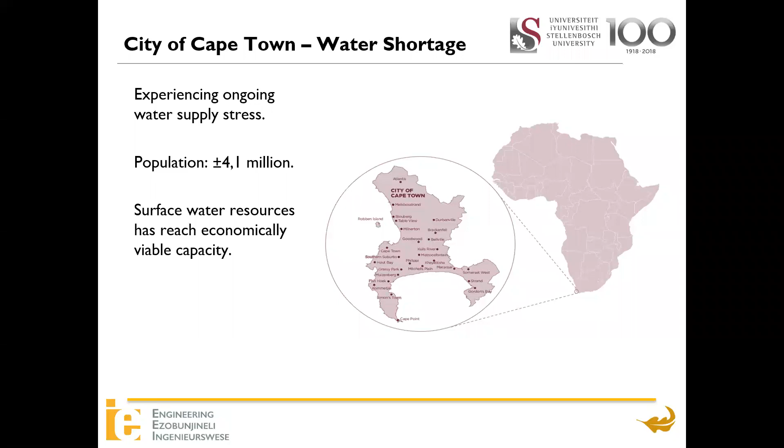So let's jump in. The city of Cape Town is an urban area with a population of over 4.1 million that is experiencing ongoing water stress driven by climate change with extended periods of drought, urbanization, pollution, and economic growth. The majority of the city's water demand is for potable water, which is sourced from surface water resources.

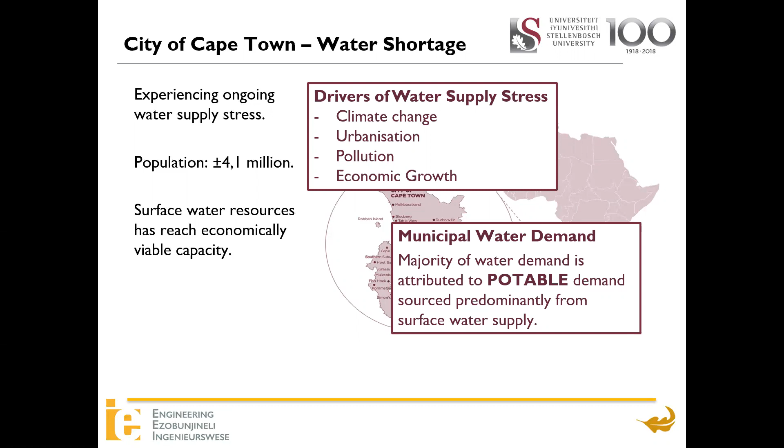Surface water resources in the Western Cape water supply system have already reached their economic viability, meaning it's not feasible to build more dams. The affordability and reliability of water resources impact the future and current investments of economic activities within the city. This highlights the economic importance of suitable and affordable water resources.

At present, approximately only 10% of water is treated for reuse in the city of Cape Town, with the reuse limited to non-potable application for industry or irrigation. Not only are the Sustainable Development Goals for 2030 encouraging the increase of treatment of wastewater, but within the reuse sphere, there lie several avenues of value generation. The value of reusing wastewater extends further than cost savings. It also reduces the demand for constrained resources.

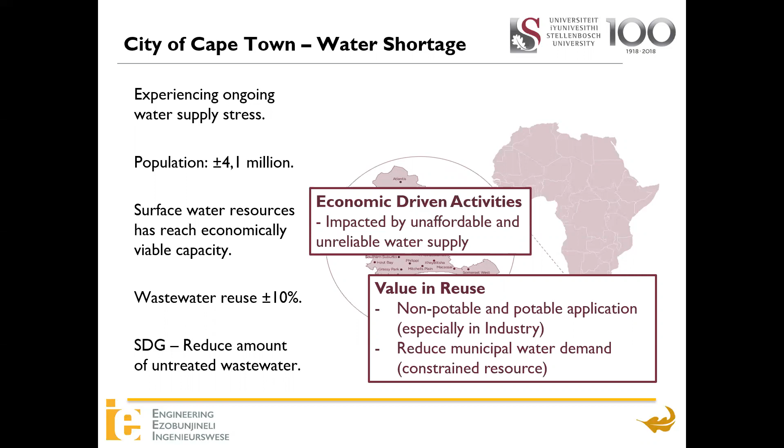In industry, the potential for effective reuse of wastewater can be derived from both centralized and decentralized sources. Centralized wastewater treatment plants offer non-potable water sources for several industry purposes, and decentralized wastewater treatment plants are implemented successfully in mines, using the treated water for a range of non-potable purposes on site. However, the majority of water requirements are attributed to potable water needs.

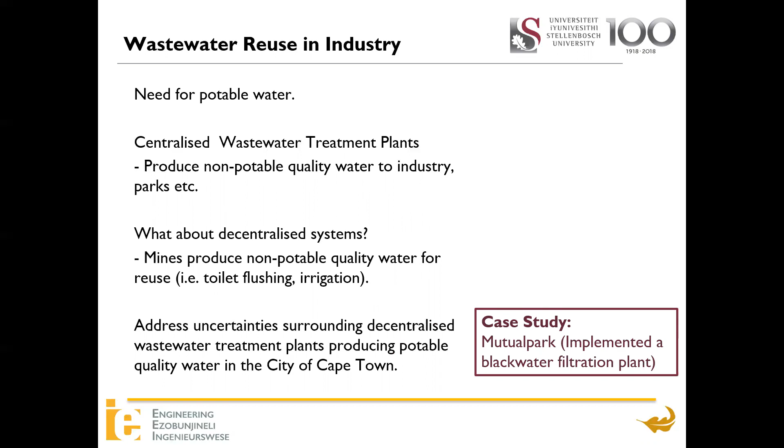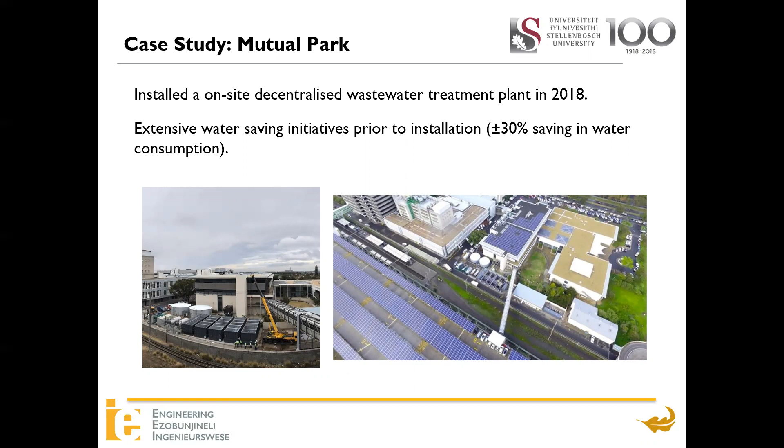To address the uncertainty surrounding the feasibility of utilizing decentralized potable water treatment plants in water-stressed areas, a case study was selected. Mutual Park in Pinelands, Cape Town, has implemented not only extensive water-saving devices and practices, it has also piloted a black water filtration plant, producing potable quality water for direct on-site consumption in 2018.

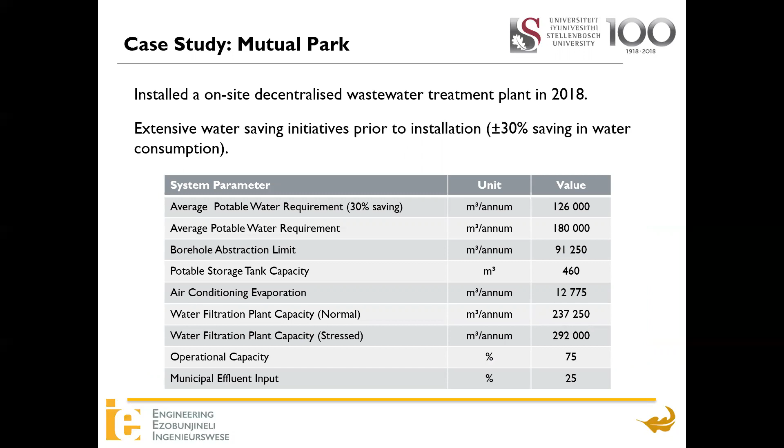The case study investigation brought to light several system parameters that were used to model the decentralized wastewater treatment system in Vensim. These parameters include the annual consumption, borehole abstraction limits, storage tank capacity, and the plant capacities of the system.

To visualize the flows of different quality water within the system, a conceptual model for the Mutual Park campus water system was constructed. The blue lines illustrate the flow of potable quality water, while the gray illustrates the treated effluent or grey water from the municipality. Yellow presents the on-site groundwater, and black, the wastewater or black water. The losses are also indicated with red.

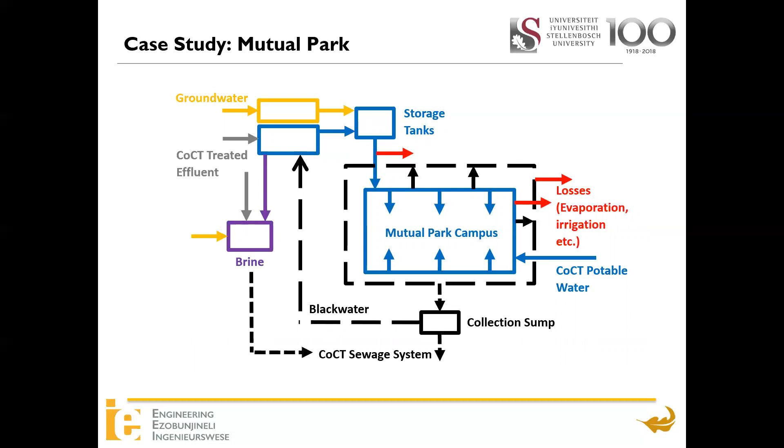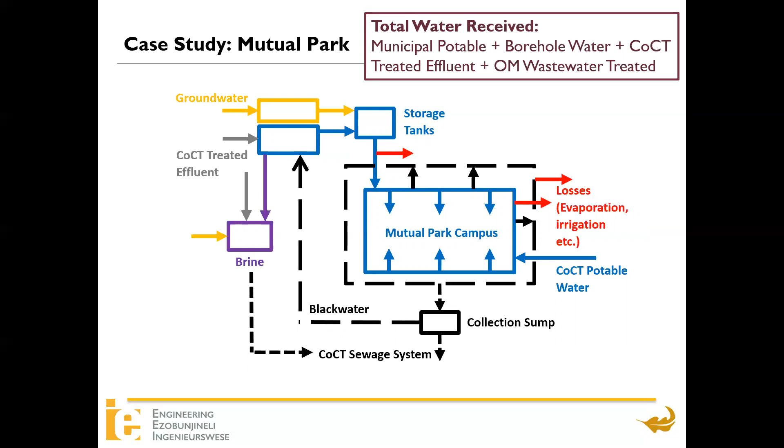Although wastewater can flow from the collection sump into the city's sewer system, wastewater cannot flow into the system from the city, even if the capacity for treatment allows for additional processing. The system receives water from the municipal sources, both potable and non-potable. Water also enters the water ring from 2 on-site boreholes and treated wastewater from the decentralized black water filtration plant.

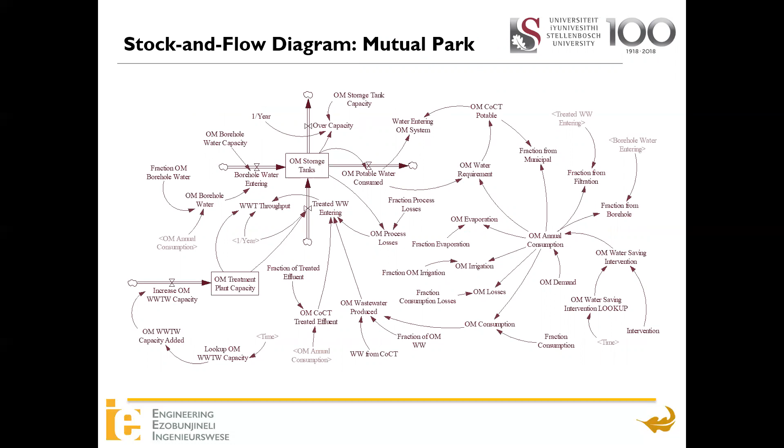From here, the detailed system dynamics model was constructed. 2 stocks are identified: the Old Mutual storage tank capacity and the Old Mutual treatment plant capacity. I'll highlight some key functions. The system throughput is calculated as the total treated wastewater entering the system divided by the Old Mutual treatment plant capacity.

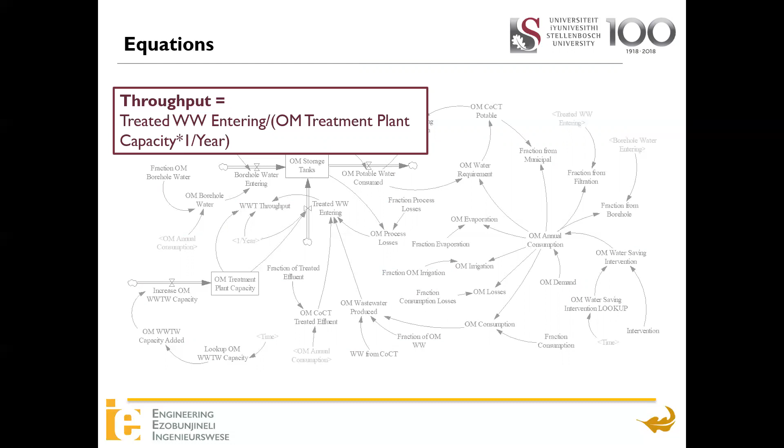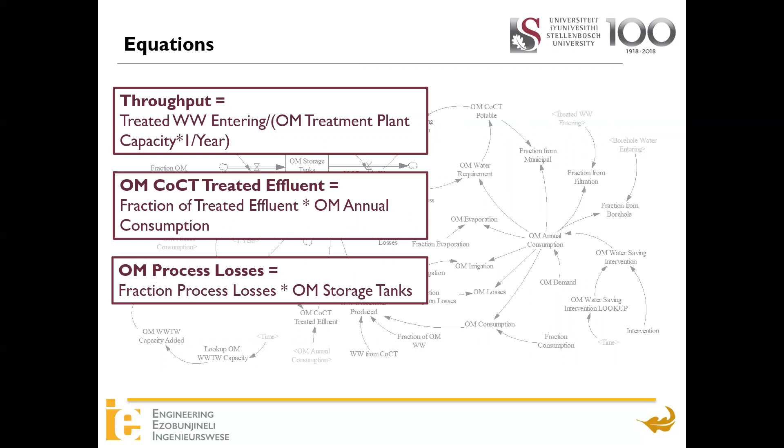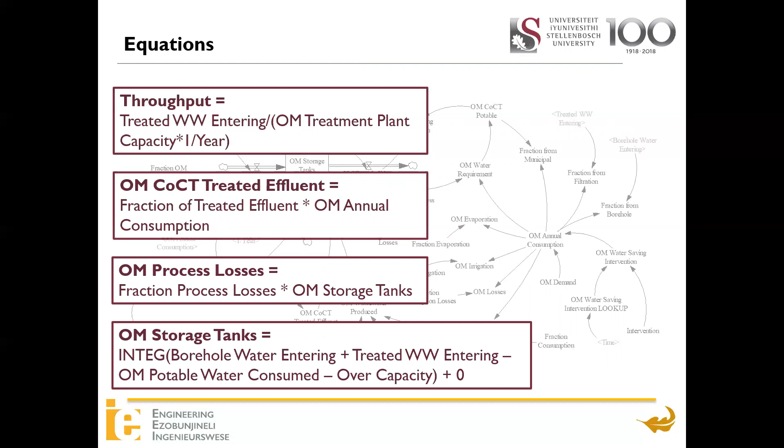The treated effluent from the centralized City of Cape Town system can be used to supplement wastewater entering the Old Mutual system. The system dynamics model also accounts for system losses, both the process and consumption losses. Storage tanks take in the water from the independent groundwater treatment system, which is treated to potable quality as well. It also takes potable quality water from the black water filtration plant. Water consumed is subtracted to reduce the amount of water stored within the tank.

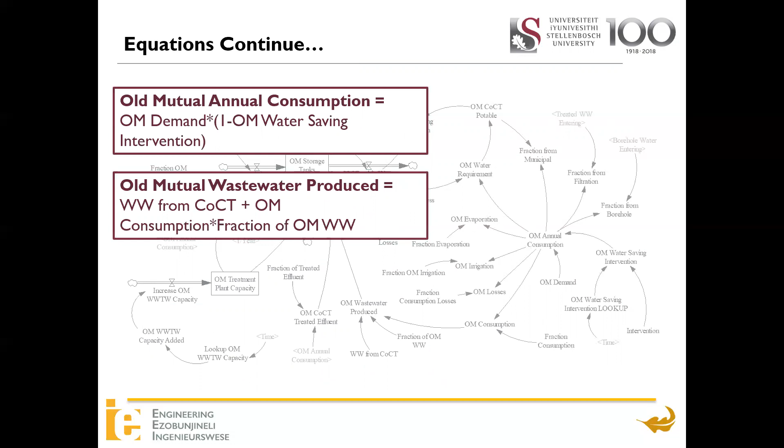Other functions include Old Mutual consumption, based on the percentage of water saving, and the amount of wastewater produced on-site. This function allows for future adjustment in the event that the City of Cape Town allows for wastewater from the centralized sewer system to flow into Old Mutual's wastewater system. This formula makes provision for the limit on treated wastewater entering the system based on the system's capacity. I've provided the calculations used in the model as additional information for those interested in further details.

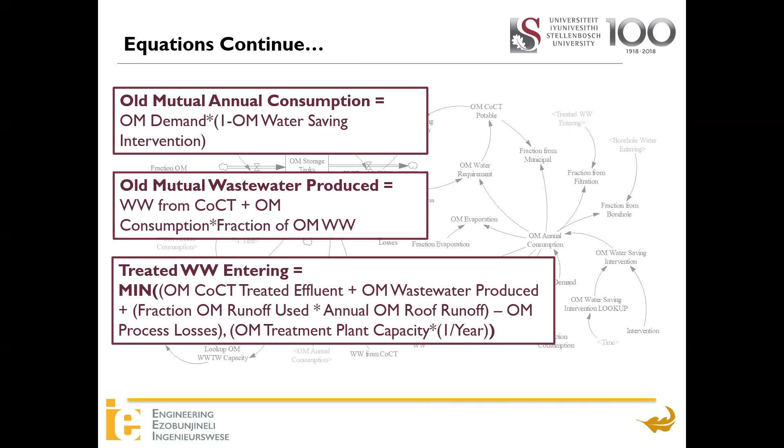To ensure a level of confidence, the model was calibrated and validated using actual results obtained from Old Mutual technical reports.

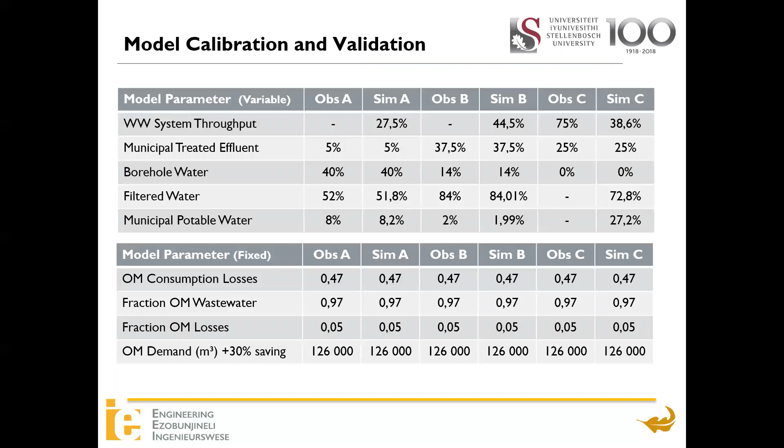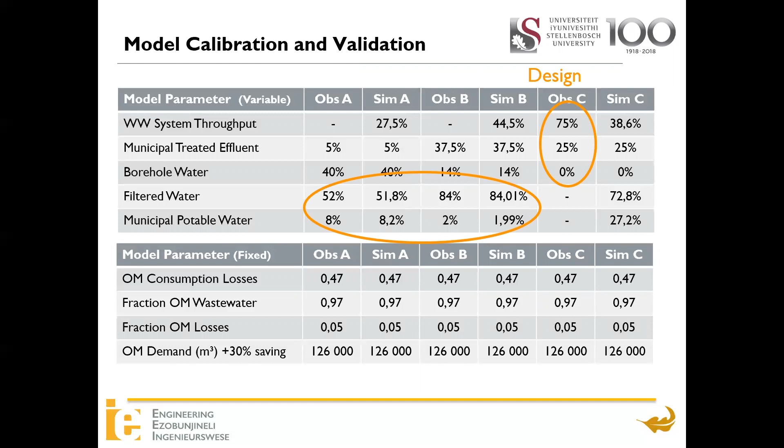Variable model parameters are adjusted for 3 simulation runs based on 3 observations. Several parameters are fixed, including the annual water consumption, with a 30% reduction in usage from initial annual consumption. The system was designed to have a throughput of 75%, with an input from the central municipal treated effluent system of 25%. Throughput was not provided as part of observation A and B. However, the throughput was found to be significantly lower without the input from on-site boreholes.

To establish the feasibility, scenarios for normal rainfall, dry periods, and droughts were tested using the Old Mutual decentralized potable quality wastewater treatment model. Commercial water and sanitation tariffs vary significantly with changes in water restriction levels, which are dependent on the availability of water resources for the City of Cape Town. Although water and sanitation cost savings can be made by substituting internal water demand with on-site treated effluent, the operating and capital costs need to be accounted for.

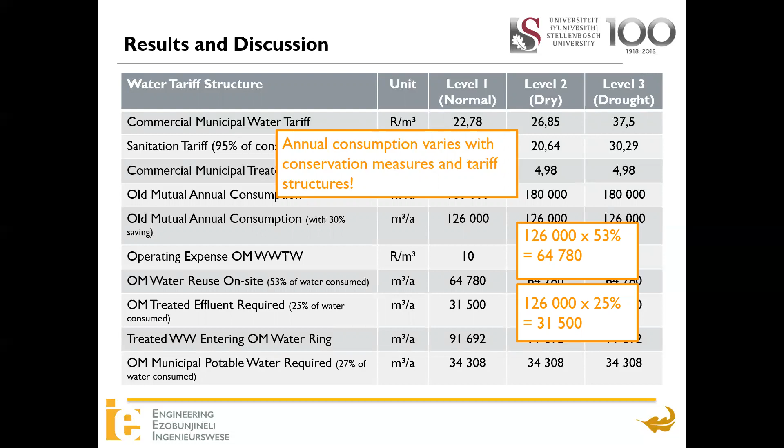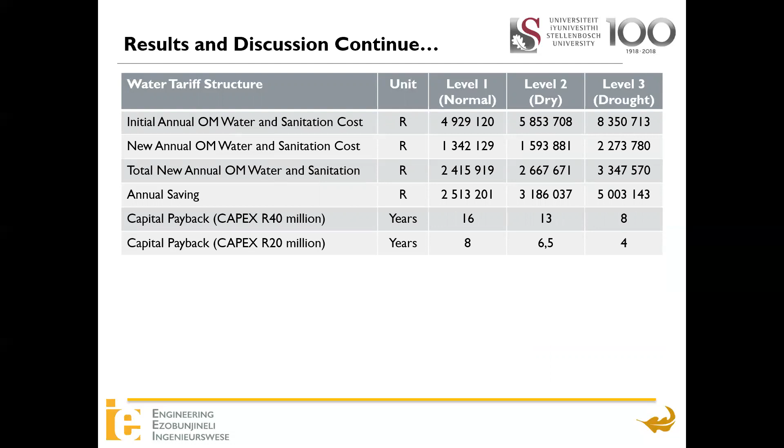The approximate reuse of wastewater on-site amounts to 53% of the total water consumed. With the supplementing centralized treated effluent set at 25%, there is still a requirement for municipal potable water. When calculating the total cost of the system for 3 scenarios, the total capital payback periods are found to be 8, 6.5, and 4 years respectively, when the system cost is 20 million rand. This period can increase significantly if the capital expenditure is more.

Here are some calculations done to find the total cost implication of these decentralized wastewater treatment plants. When considering climate change, it is evident that there will be periods of drought, followed by periods of considerable rain, and as such the payback period may vary from the results presented. It is clear that the system dynamics model and associated simulated scenarios provide decision makers and investors with insight and information regarding the cost and operation of such a system.

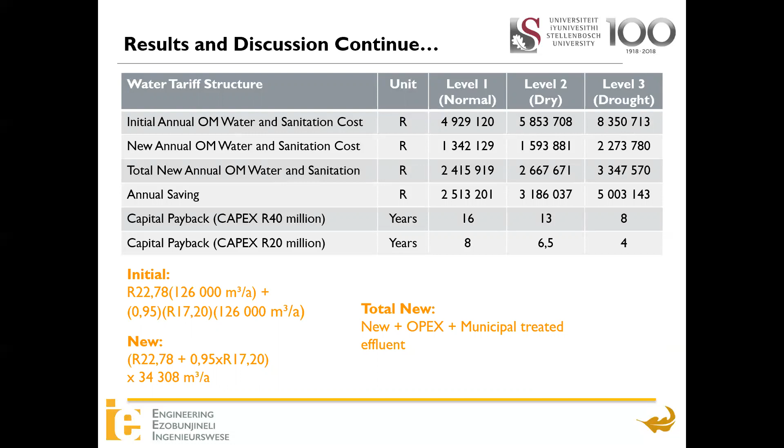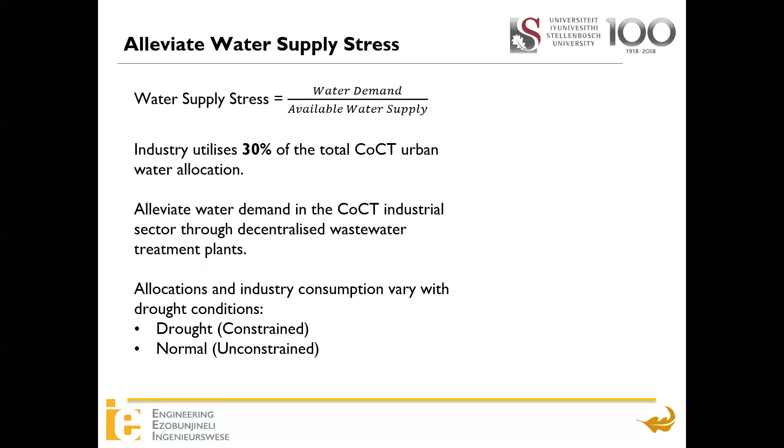The impact of water supply stress is another feasibility factor that needs to be considered prior to investing in decentralized wastewater treatment systems. Industries utilize approximately 30% of all water consumed in the City of Cape Town. Subsequently, alleviating water demand in the industry sector can significantly reduce overall water supply stress. The consumption and allocation of water resources also vary with conservation measures or restrictions, constraining the allocation significantly. The number of decentralized wastewater treatment plants and their impact on water supply stress for both constrained water usage during periods of drought and unconstrained usage during normal rainfalls are compared.

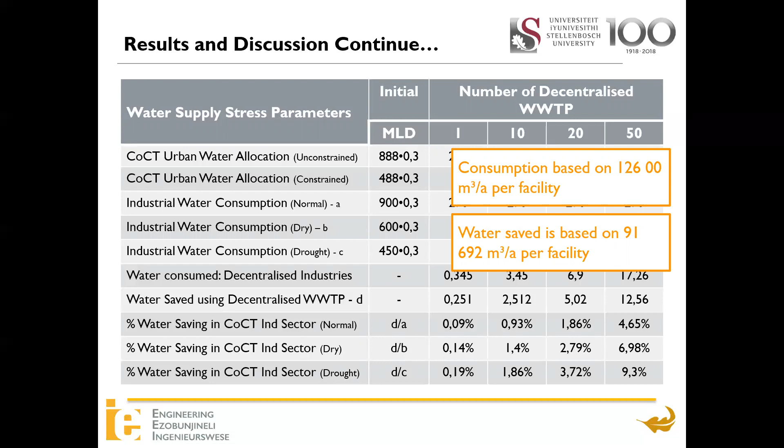Using the water consumption and savings presented by the simulated results, the amount of water consumed by industries implementing decentralized wastewater treatment plants, similar to the one used by Old Mutual, are calculated. These values are used to estimate the potential saving that can be achieved. Water consumed and saved per facility is based on the consumption and water savings of the simulated Old Mutual plant. These savings are translated to the change in the City of Cape Town's water supply stress, where a water supply stress of 1 or larger indicates that the water demand exceeds the available resources.

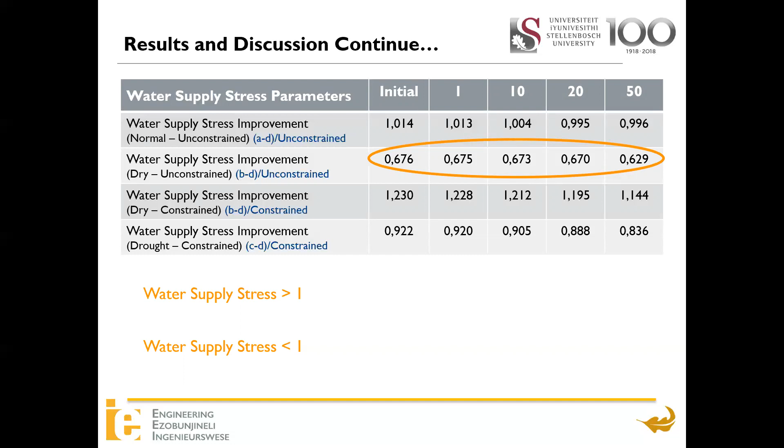To conclude, I would like to emphasize the importance of sustainable future endeavors, especially in the reuse of wastewater as a valuable source of potable water. The City of Cape Town is actively encouraging the diversification of water sources to supplement constrained natural resources. It is evident that the reuse of wastewater for potable purposes has significant potential. However, these systems are not always economically feasible, as presented by the simulated results.

Tax incentives have the potential to provide investors with added encouragement to consider the implementation of decentralized wastewater systems, as these systems also offer industries the needed assurance of available quality water. These factors need to be considered during decision-making. It should also be noted that the study found that the decentralized systems are inherently connected to the larger centralized system.

Finally, the system dynamics model constructed using the Old Mutual case study can be adjusted to serve as a supporting tool for decision makers and investors for other specific systems or parameters. The scenario development and results provided insight into the feasibility of private investment into potable wastewater treatment plants, highlighting the variances in payback periods and the efficiency of these systems during drought and normal rainfall periods.